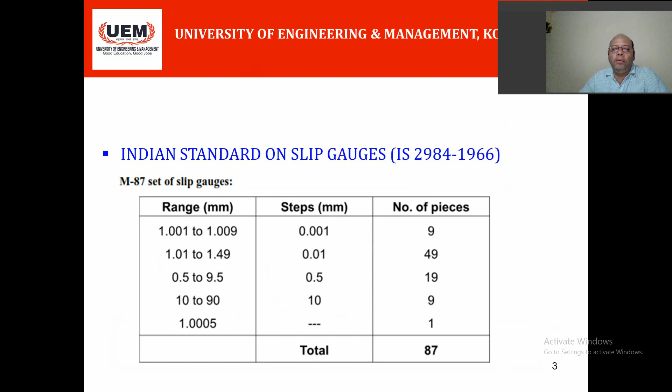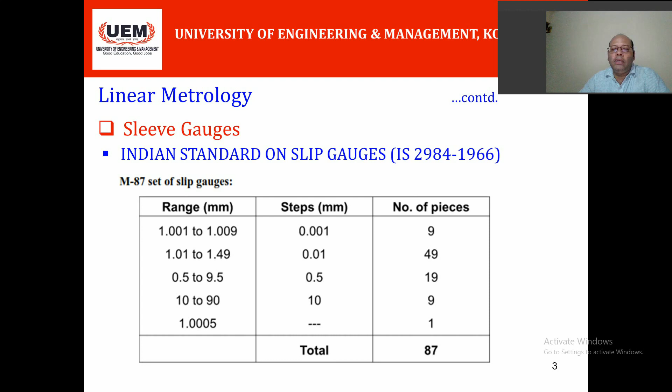M112 slip gauges. In the case of the M87 set of slip gauges, as per Indian standard IS 2984 1966, there are 87 slip gauges, and in the M112 set of slip gauges there are 112 pieces. In the range 1.0005, there is only one piece. 25, 50, 75 and 100,

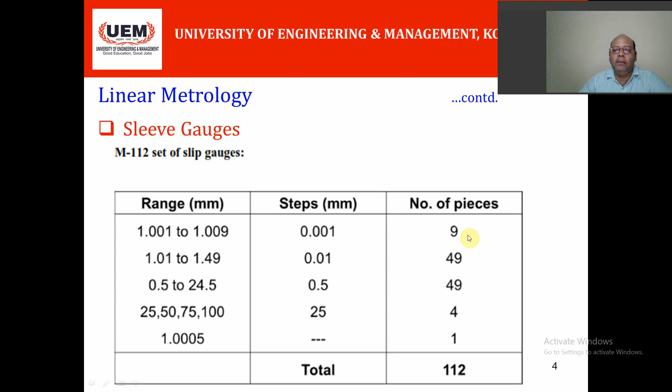the next, 1.01 to 1.49 with steps of 0.01 millimeter, has 49 pieces. Next, 1.001 to 1.009 millimeter with steps of 0.001 millimeter has 9 pieces. And next is the problem.

You have to build up a length of 35.4875 millimeter using the M112 set. Use two protector slips of 2.5 millimeter each. The 2.5 millimeter protector slips will be attached at the bottom and at the top of this combination of slip gauges. So you have to subtract 2.5 into 2, that is minus 5, from 35.4875. So it will be

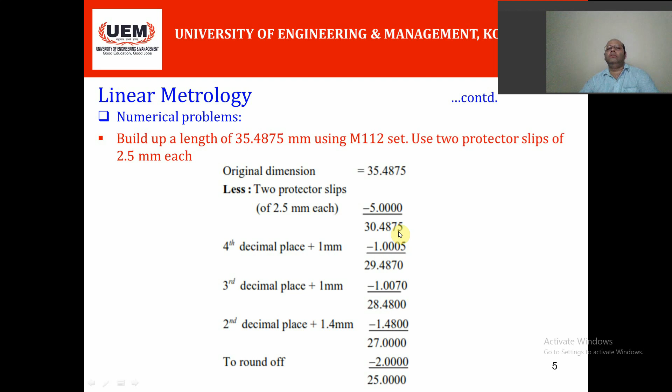30.4875. Next you have to consider the last decimal value that you will obtain from these slip gauges, that is 1.0005, and after subtracting this we will get 29.4870. When you get 29.4870, up to the third decimal place, that is minus 1.007, we will get 28.48,

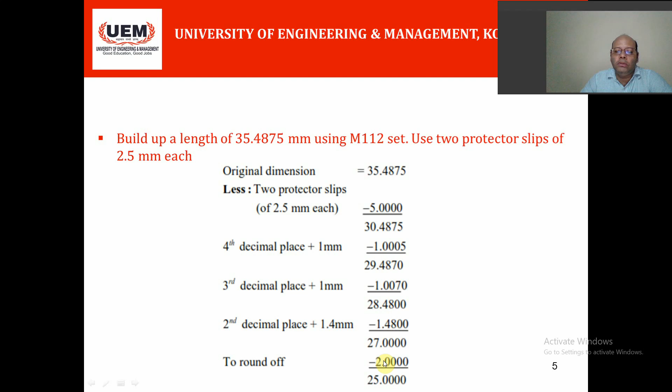and from 28.48, another slip gauge from this range, 1.48. If you subtract this we will get 27, and round this up with minus 2, that is 25. So the combination of slip gauges will be like this: one protector slip gauge at the bottom and another protector slip gauge at the top, then 25 plus 2 plus 1.48 plus 1.007 plus 1.0005.

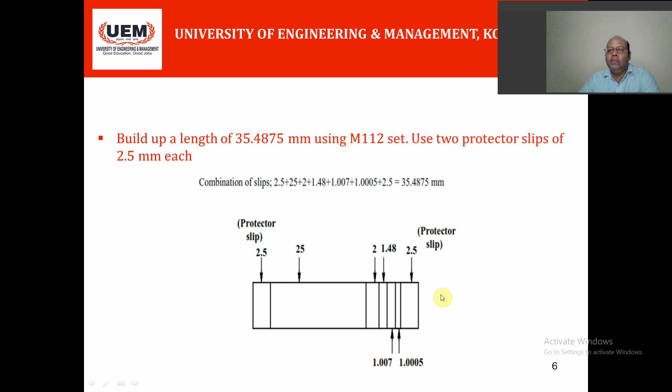So 1, 2, 3, 4, 5 slip gauges are used, with two protector slip gauges at the bottom and the top, for the combination of 35.4875 millimeter. These protector slip gauges are used to protect the costly slip gauges from wear and tear, since these bottom faces are in contact with the measurement.

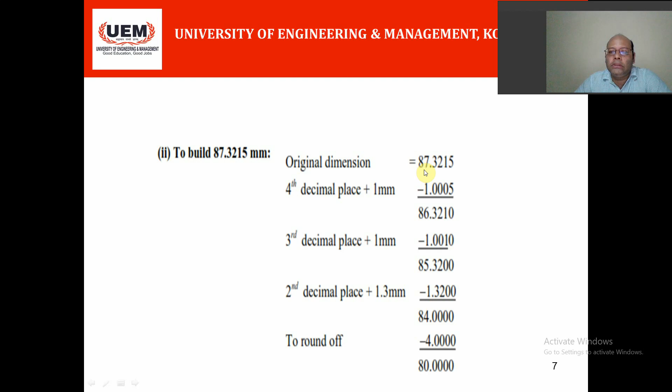Now another: you have to build 87.3215. In that case we have to subtract 1.0005. Here no protector slip gauges are used, and with the M87 set, so you can see the difference between these two. Here no protector slip is given,

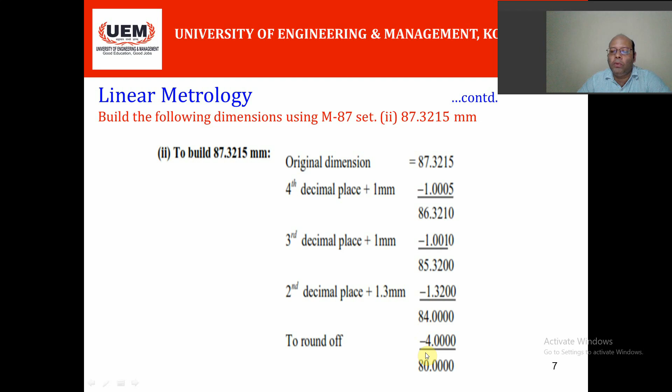that is 86.3210 minus 1.001, that is 85.32, and from the 87 slip gauge box, minus 1.32, we will get 84, minus 4, 80. So 80 plus 4 plus 1.32 plus 1.001 plus 1.0005, that is 1, 2, 3, 4, 5 slip gauges will be used without any protector slip gauges.

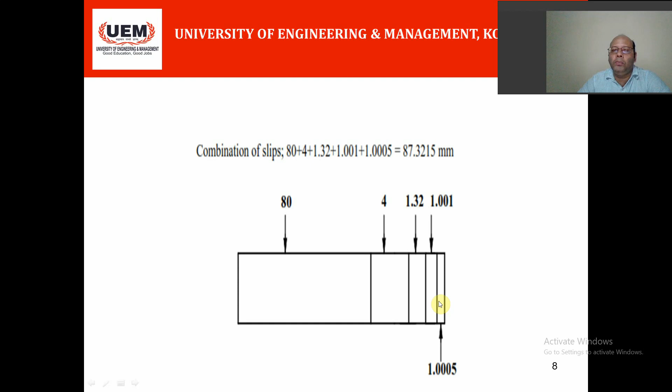In this way, the wringing of slip gauges is used to get any value or combination of slip